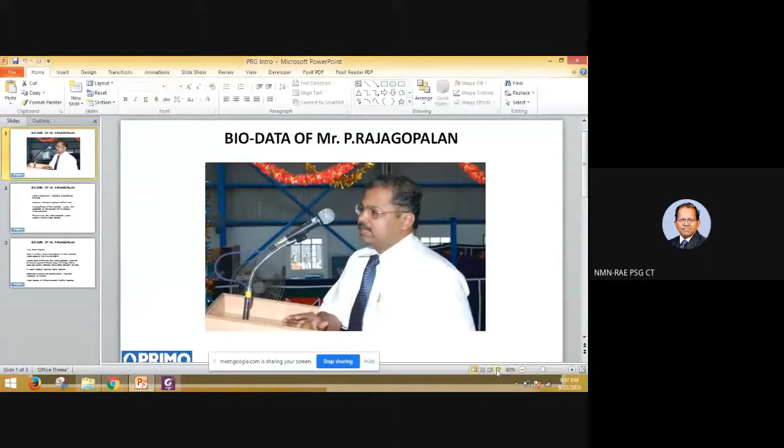He is a graduate in electrical and electronics engineering from IIT Madras and worked as a maintenance engineer in L&T for 9 years. He is presently the managing director of Primo Automation Systems, which he promoted 25 years ago along with his colleague, Mr. Balasubramanian, who is also an IIT Madras product. Together they have developed a lot of systems, with over 1,000 welding automation systems installed in India and 8 other countries.

A very creative engineer and expert in innovative design and development of various automation systems, deploying PLCs, CNCs, and robots. He installed dozens of India's first-time welding automation systems for the business segments of thermal energy, wind energy, defense, space, steel building fabrication, railway bridge fabrications, and more.

An expert in deploying advanced welding processes, experienced in designing and executing turnkey and mega plant automations for industries, a good integrator of welding and materials handling automation. So really, we are very fortunate to have him because he has that much experience in the welding industry and especially automation industries. He has accepted to share his experience. So now I hand over the session to Mr.

Gentlemen, Primo is the company that I started along with my colleague Balasubramanian 25 years ago, and this financial year is our silver jubilee year. Our current discussion here is limited to robotic welding automation and Industry 4.0, though we also do many other non-robotic welding systems.

The basic objective of robotic welding systems is to replicate the functions of a welder's arm and a welder's wrist. I have used the word basic in red color because as we go down the presentation, we will find that there are more objectives which are getting fulfilled. But this is a very basic objective where the functions of a welder's arm and wrist are duplicated by the robotic arm.

The current day robots, which have evolved over the years, are of 6-axis configuration, and the simultaneous functioning of one or more of these axes is what is helping us to replicate the welder's wrist action.

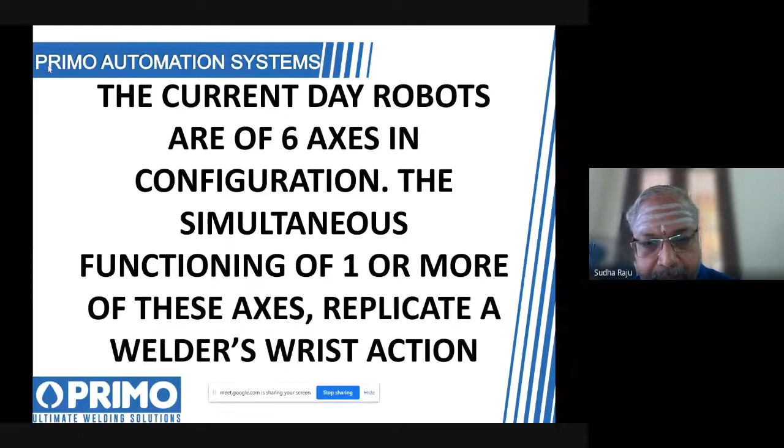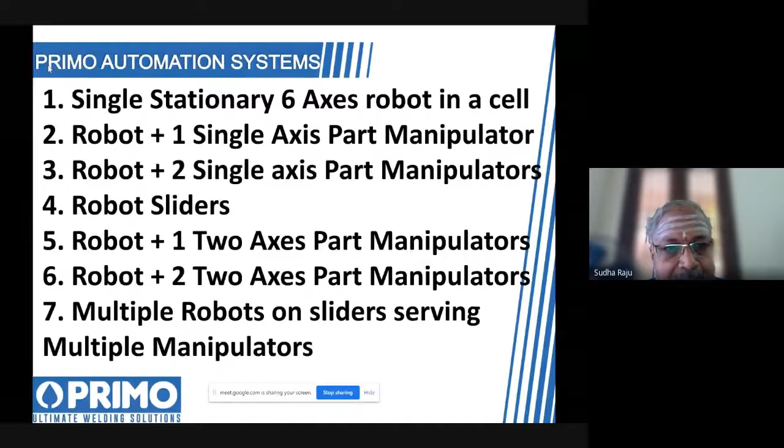A robotic welding work cell can be of various configurations. In fact, the only limit is one's creativity and innovation. However, to share some of these configurations, I have listed about 7 of them here. The first one is a stationary robot. The part doesn't move; only the robot moves and does the welding inside a work cell. All of these are presented with appropriate pictures in the upcoming slides, so let us go to them and discuss there.

The second configuration is one where you have a stationary robot, but the part is manipulated in one axis. We call it a head and tailstock manipulator, while the robot is stationary but articulated in its 6 axes.

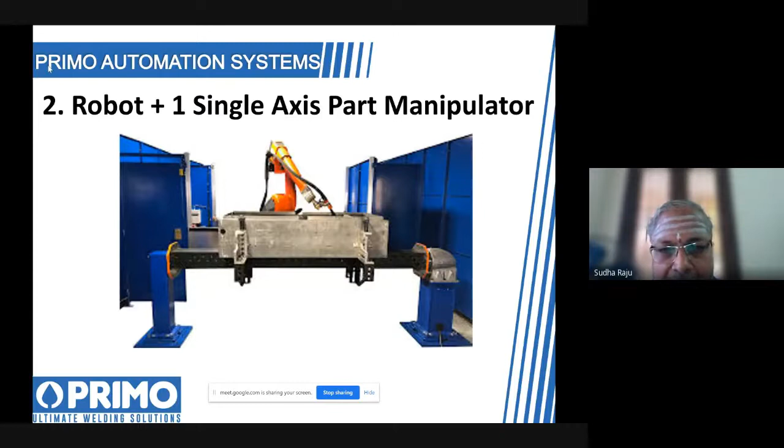The purpose of such a configuration is to mask the manual activities of loading the part, unloading the part, clamping the part. All those activities do not add to your cycle time. You can improve your productivity by having this configuration. The robot, I said, has got 6 axes, and the 2 manipulators have got an axis each. So this becomes an 8 axis work cell.

Where the envelope of the component or the part is very large, we start using what we call robot sliders. The robots by themselves have got a certain work envelope. If you put them on a slider, that work envelope gets enlarged to the extent of the length of the slider. This is one of the essential requirements of robotic welding automation where the part dimensions are large.

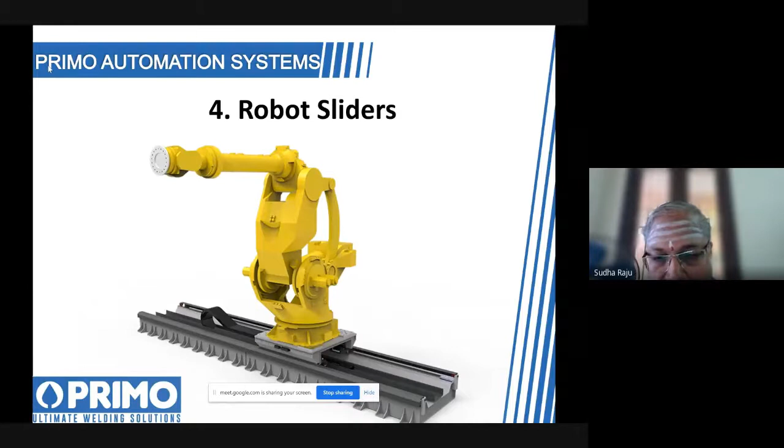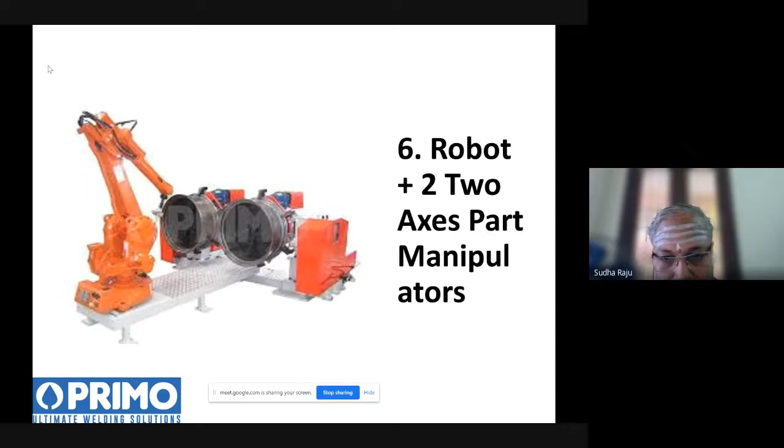The last one under the configurations is multiple robots serving multiple manipulators in a common work area. There are no limitations to the number of robots that can work inside a single work cell. And this would be a very high level of automation.

I previously said that the robots are developed to basically replicate the welder's arm and wrist. But as the robots evolve, we are also trying to do the job of a welder's brain. The current day robots are equipped with functions that help the robots to perform a little more than just the wrist function. It also does certain processing, what we call the welder's brain.

For example, a welder looks at the joint, he starts welding, and as the welding progresses, he makes course corrections depending upon the way the joint progresses. His eyes are seeing the joint, his hands are doing the course correction, and his brain is doing the processing of connecting the eyes to the hands. These functions are also now enabled in the robots. That is why I say that nowadays they can, to some extent, replicate the welder's brain also, though you can never replace the welder's skills in their entirety.

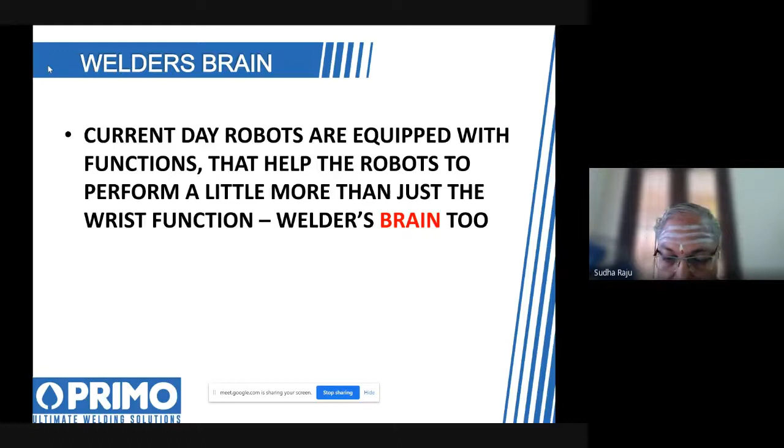Let us see a few examples of how this function is done. A situation where the robot is programmed to start welding at a particular coordinate, but we are not very sure that the job is going to be exactly there. That is, the weld start point is not going to be exactly there. It could be away by a few millimeters. But we want to start at the right place. I'll show you how the robot detects the starting edge of a component in this video.

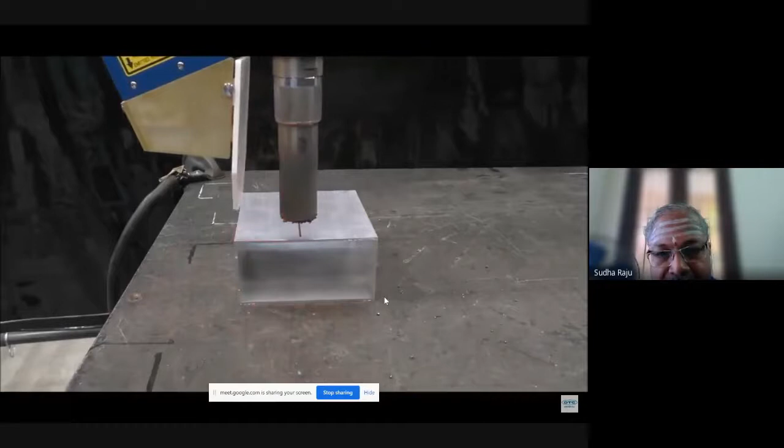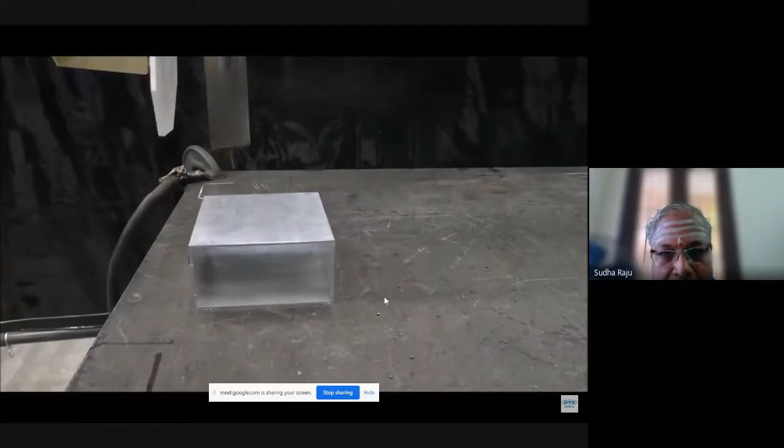This square block is being scanned by a laser sensor integrated to the robot. The robotic torch comes and stops exactly at the corner, and then it continues to track the edge. Now you will see the part being disturbed in position, and you can see how the robot tracks the start point again.

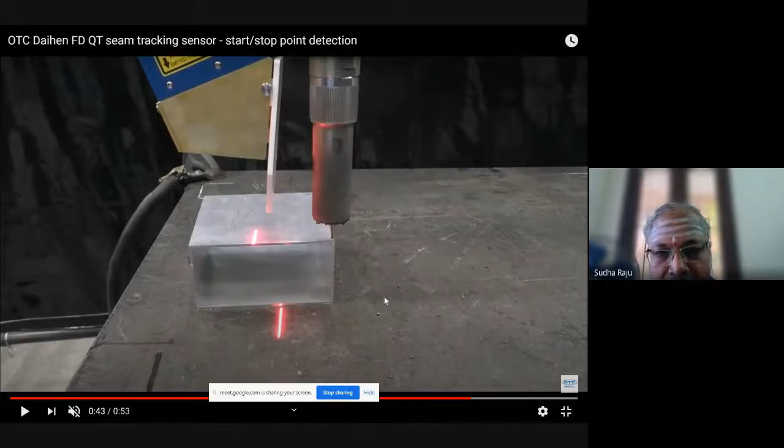Yes, you see that the robot has come and stopped exactly at the start point even when the part was disturbed in its position. It then continues to track the edge and stops exactly at the end. So this is basically to demonstrate the operation of a function called start point detection, which enables the robot to understand the start and the end points. This is used when the welding is actually a straight line, but your start and end points could be varying. So the robot detects the start point, detects the end point, and does the welding automatically.

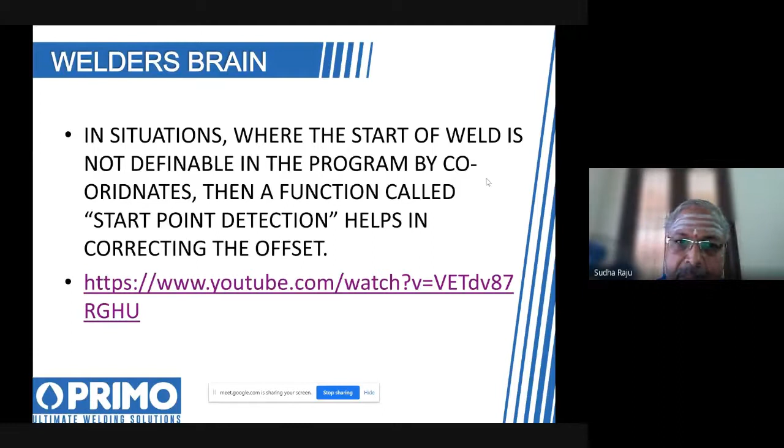In the same direction of replicating the welder's brain, let us look at a second situation wherein the robot starts welding, but the actual joint is not in the programmed path. The programmed path and the actual joint are differing. It could be the variations in the component or the variations in the fit up. The robot has got a function called through the arc seam tracking, where while welding, it will understand the root of the weld and track it. Let us have an idea of the same through this video.

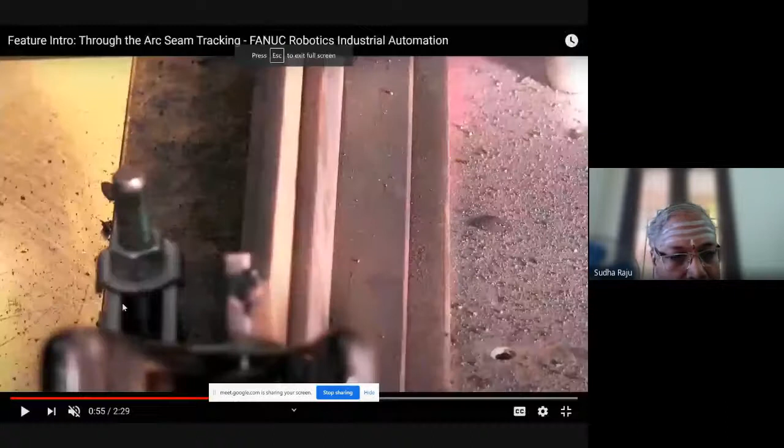You are seeing the joint here in this picture. This is the joint where the welding has to happen, and you will now find the programmed path of the robot is completely deviated from that. You can see the amount of deviation.

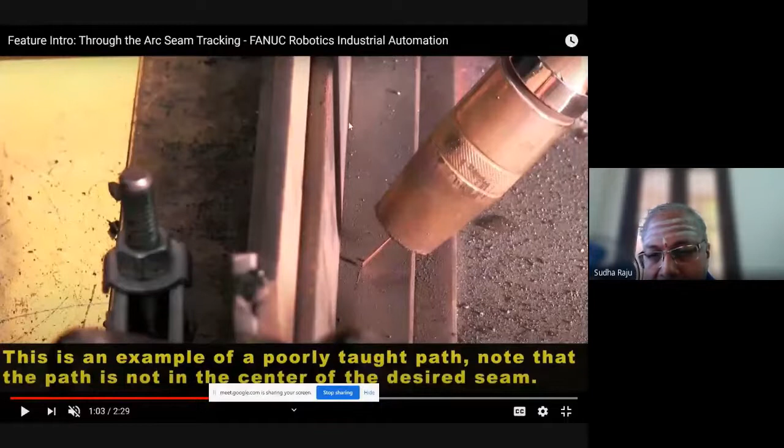This is where the joint should have been, but this is where the joint actually is. It could be an error in teaching, that is why it is written as a poorly taught path, or it could be an error on the part fitment.

Now, once you start welding, the robot, through the welding parameters, continuously does the course correction and will weld exactly on the joint. The torch is weaving across the weld joint. Now you see that the fillet is exactly at the root.

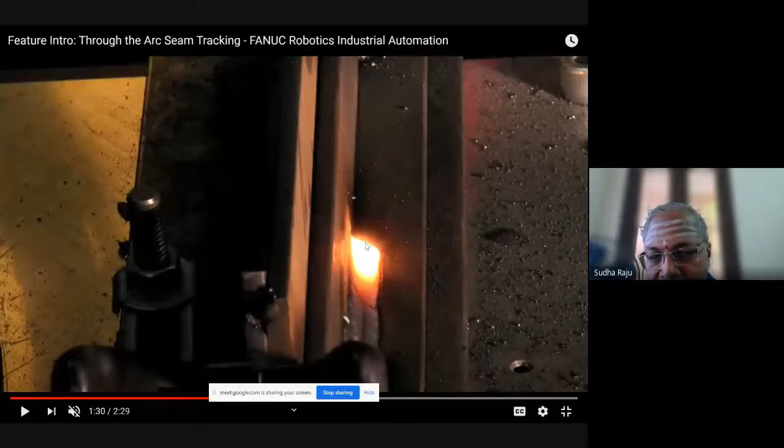Actually, it should have gone like this. This is how the robot does the course correction. It picks up the welding parameters as it does the weaving at the left and the right end of the weavings, and continuously processes those data to average them out. You will see a second weld now, which will also happen exactly at the root.

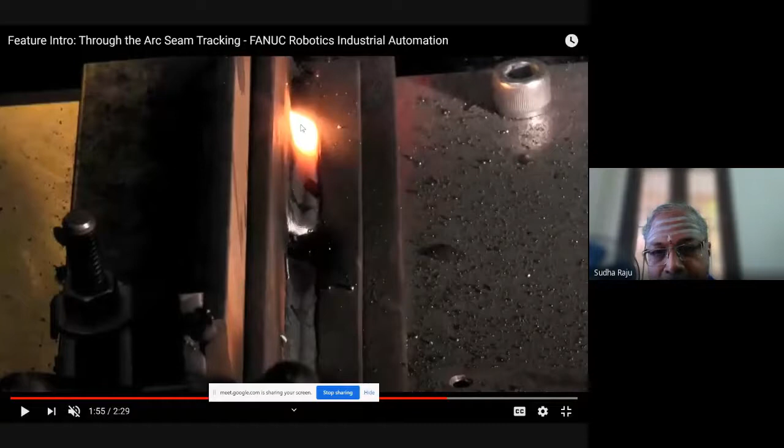You can find that the weld has happened exactly at the root. It has not deviated. This is one of the tools or functions in the robot called through-the-arc seam tracking or arc sensor. Different robots have got different names for it. This also is a tool that helps us to replicate the welder's brain to some extent.

Now, let us look at a situation where the robot is not going to be programmed. Whatever the joint profile is, the robot is expected to track it. Previously, what we saw was a situation that we have a programmed path, we have an actual path, and there is a deviation. We are going one step higher in this.

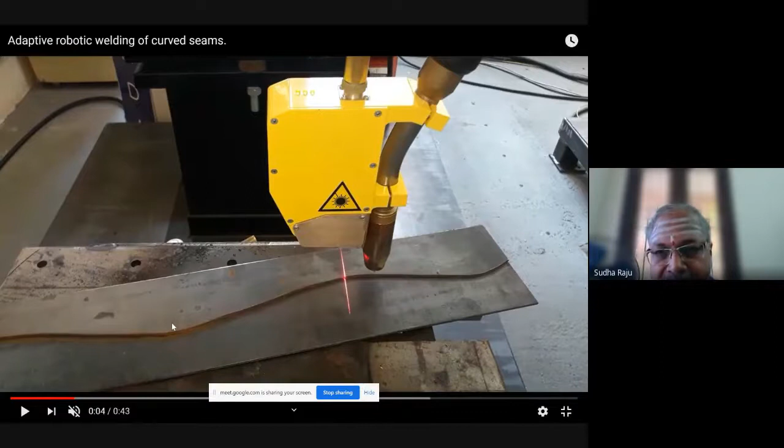I don't have a programmed path. I have a profile, and the robot has to see the profile and track it. You can see how this is being done. Here we use laser sensors. In the previous one, we did not have a laser sensor. The robot itself had some functions built into it, but this is a more demanding requirement.

You can see the weld joint here. It is in a profile. The bottom plate is a rectangular plate. The top one is a laser cut part, and the welding has to happen between these two parts. This laser scanner, which is leading the welding torch in the robotic arm, continuously processes the weld joint dimensional coordinates, sends them to the robot, and the robot continuously makes course corrections dynamically as it travels.

Now you will see that happening. Just watch the robot arm turning its wrist and continuously tracking the edge. These are the intelligent functions that are getting built into the robot, and it's a continuous evolution process. This is not pre-programmed. This is not pre-taught. On the fly, dynamically, this is being tracked.

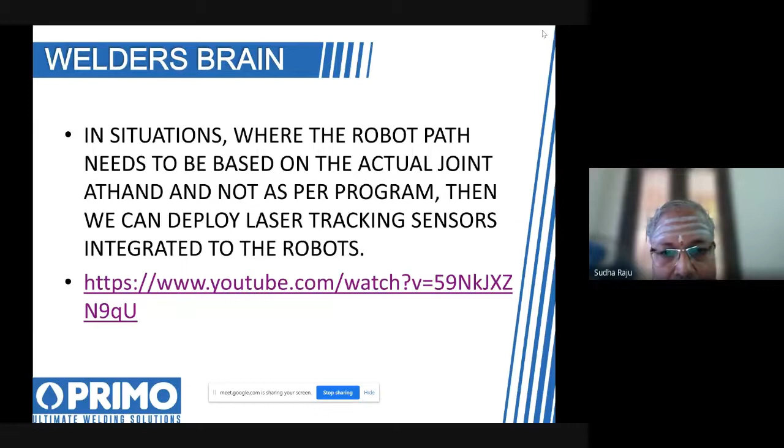So these are some of the functions where the robots not only replicate the wrist or arm of a welder, but it also does the functions of a welder's brain to some extent.

Now let's look at a few robotic system images which we have built in the last few years. And after seeing them, we can also look at the videos of some of them.

In welding, you have arcing time and non-arcing time. Even though non-arcing time is an essential requirement, it is not a productive activity. So this configuration helps us mask the non-arcing activities, thereby giving a very high arc factor. Arc factor is the percentage of time that we are arcing on the work cell. If the robots and welding machines are idle, we are not producing out of the work cell, even though we may be working on it. This kind of configuration would have an arc factor as high as 70%, which is not a practical possibility in a manual welding environment.

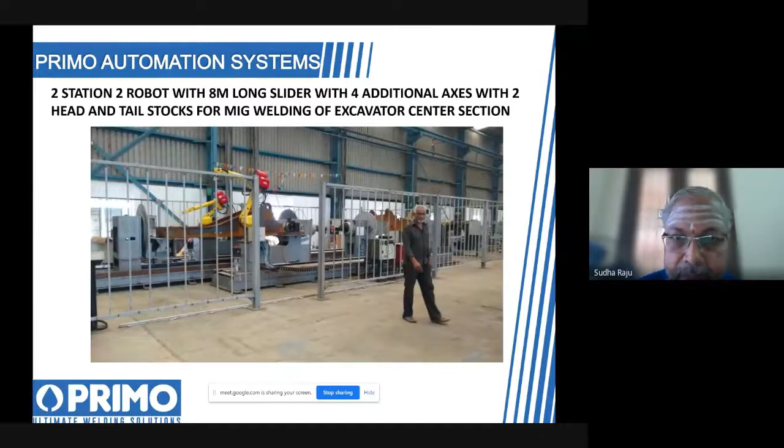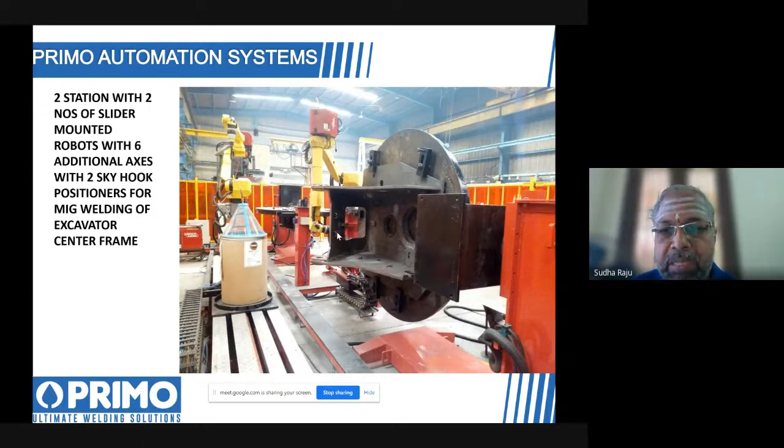This is the same configuration, the same part as the previous picture, but here we have two robots doing the job. These decisions are taken based on the output required in a shift of 8 hours. In the previous work cell, the customer wanted a certain output per shift, and in this work cell, the same customer wanted a very large output. So we have two robots serving two manipulators, and each robot is on its respective slider.

If you count the number of axes in this configuration, each robot has 6 and 6 axes, that makes 12. Each robot has a sliding axis, that makes it 14. Each manipulator has 2 axes for rotation and tilting, that makes it 4. It's an 18 axis robotic work cell - a very highly automated working environment with very high levels of productivity.

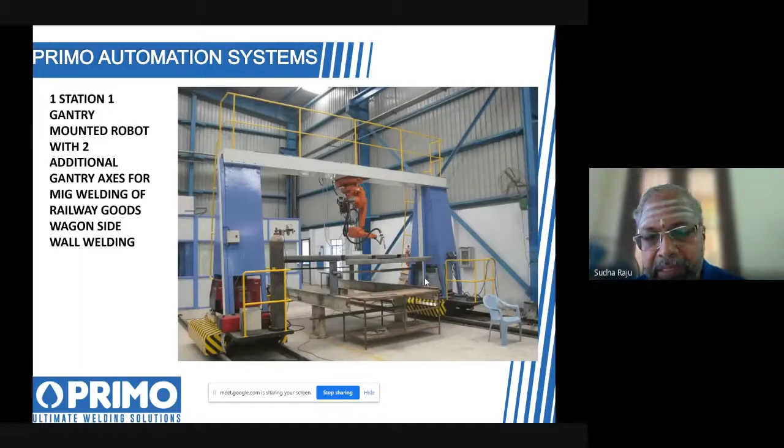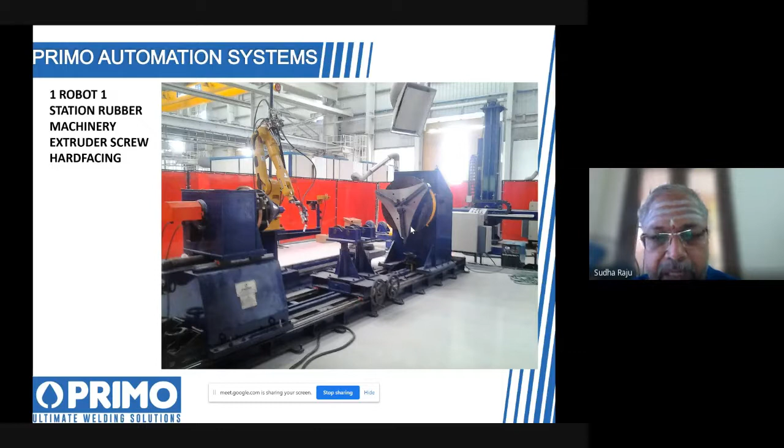Robots are also used in large, heavy fabrication areas. In fact, we specialize in them, and not just the sheet metal stuff or the light ones. What you are seeing here is a head and tail stock for doing hard facing on an extruder screw. It's a very large screw weighing heavily, and the robot would perform welding continuously for hours together on one screw once it is started.

This is another configuration. In the starting of the presentation, I said that the only limit to robotic cell configuration is the creativity and innovation.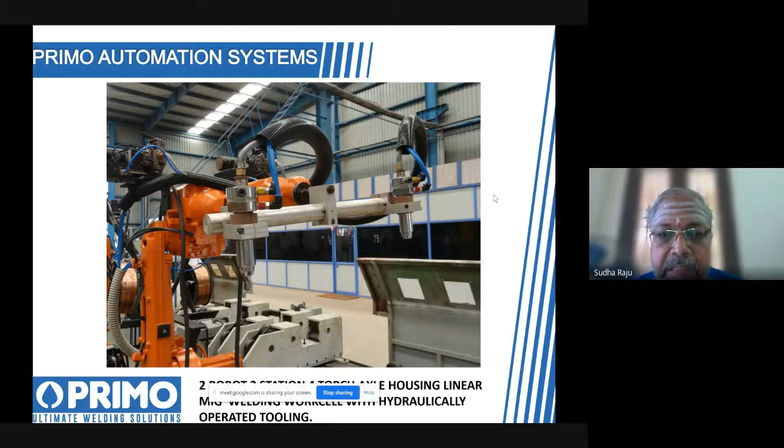As I said, there are a lot of creative and innovative options in robotic configurations. What you are seeing here is two welding heads mounted on a single robot wrist. When the customer came and said that he wants to produce 400 dummy axles per day of 24 hours, we worked out this configuration.

There are two such robots on the machine, which means there are totally 4 torches handled by 2 robots, and each torch is doing MIG welding with a 2 mm wire at 600 amperes of current. Normally, MIG welding stops at 1.6 mm wire, but we stretch the limits and use 2 mm wire, 600 ampere per torch, 2 torches per robot, and 2 such robots on the work cell. That makes it 4 torches, 4 into 600, 2400 amperes of MIG welding simultaneously on one component.

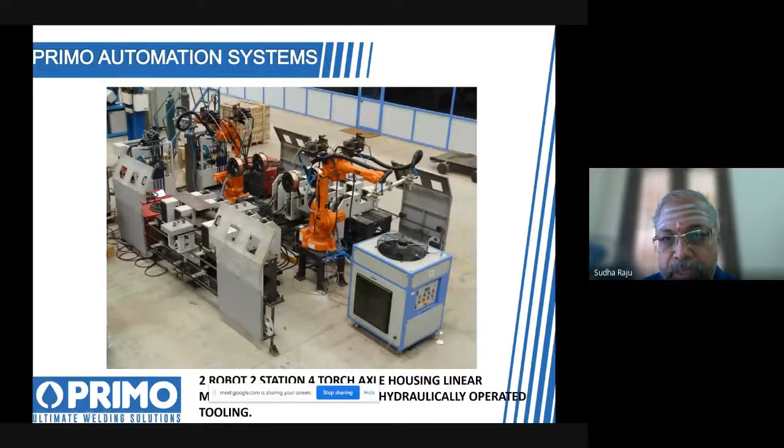And like that, there will be 2 work cells at the front and rear to get the required productivity. You are seeing that actual image here. This is one robot carrying 2 torches. This is the second robot carrying 2 torches. You can see the 4 spools here. This is one work cell, and this is another station A and B.

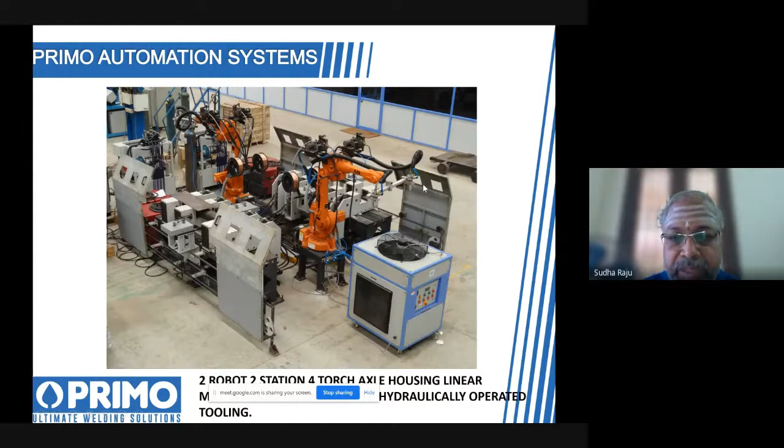So we mask the loading, unloading, clamping and declamping times. We also increase the arcing productivity with 4 torches. This is a hugely productive work cell configured by Primo for our customer.

Having seen some images, let us look at a few of the videos of this equipment.

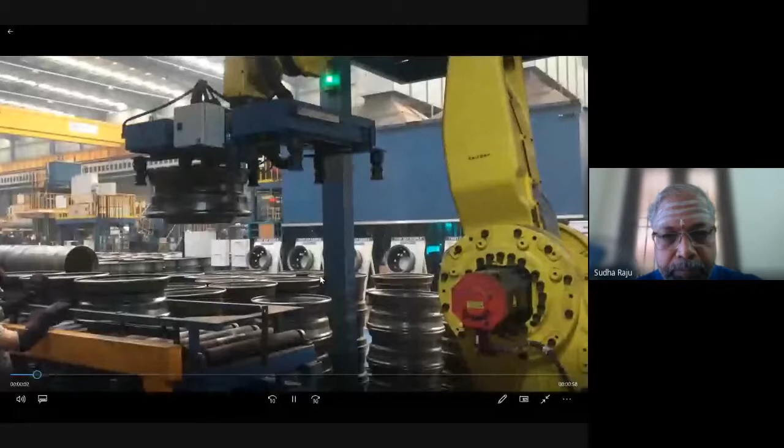In this video, the robot does the material handling while welding is happening on fixed automatic machines.

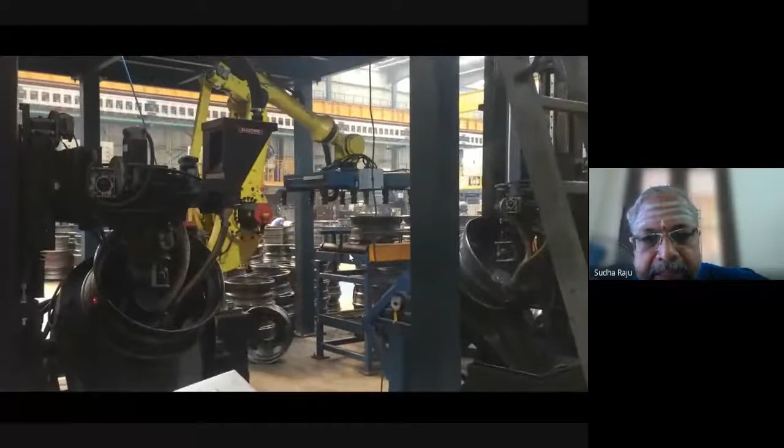The robot is serving 4 welding stations. There is an in-feed conveyor and an out-feed conveyor. The robot picks up from the in-feed conveyor, places it on any one of the 4 stations, and places the welded wheel on the out-feed conveyor.

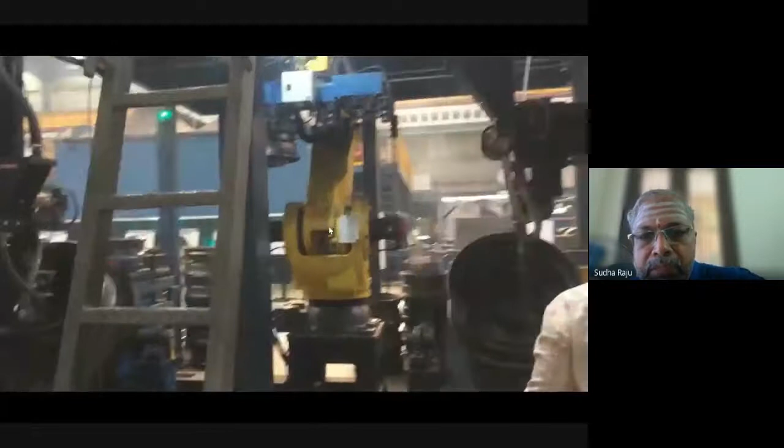The robots will not come to the welding machine unless the operator presses the button saying that he has moved away.

Now let's see another machining application where the robots are used for loading and unloading.

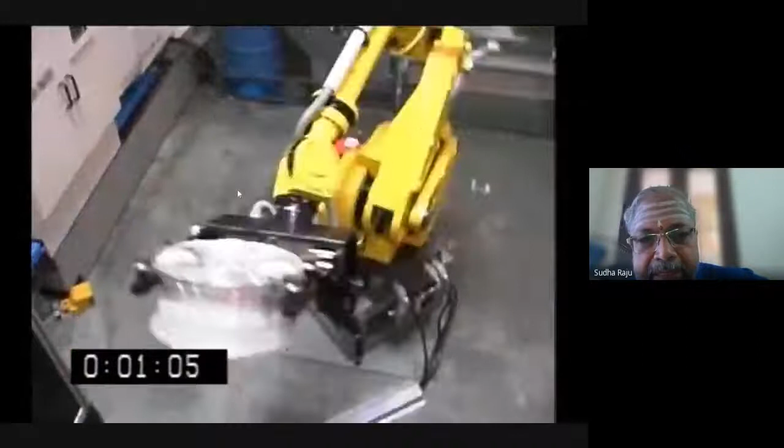You can see how continuously the robot is serving the 3 machines. The wheel moves from one machine to another, and it places the processed wheel onto the outfeed conveyor. As you can see, it is 1 minute 7 seconds processing time and 53 wheels in 1 hour, just over a minute per wheel, with 3 operations happening.

I'll now show you another video. All these are to basically expose the various kinds of possibilities that are there with the robot in an automation environment, either for welding or for handling or for combining welding and handling. Now you look at this video, it's a pleasure to watch.

It's very important to keep the welding requirements in mind when configuring the robotic work cells. Which joints need to be welded in 1G, which have to be welded in single layer. All these need to be considered before configuring a work cell.

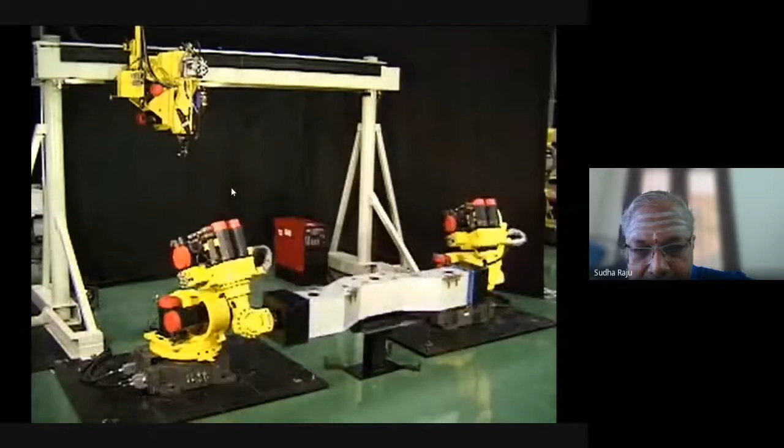Can we call this a completely unmanned work cell? It is practically so. We just have to bring the part through the crane and take the part out by the crane.

I will now show you another video wherein the profile of a screw, an extruder screw, is being tracked by the robot. You are seeing an extruder screw here, used in a food processing industry machine. The flights are a continuous spiral, and you will see how the robot is tracking this spiral.

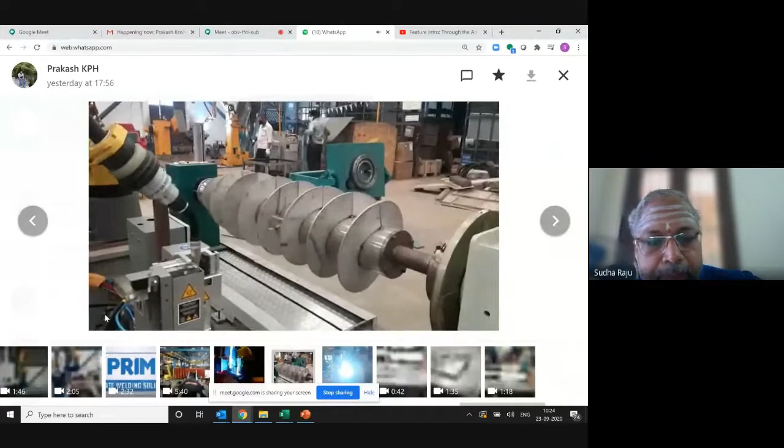This is the wire cutting and cleaning station, where the wire, that ball tip of the wire, is cut. The gas cup is cleaned to avoid porosity in the welding, and then the robot detects the start point automatically.

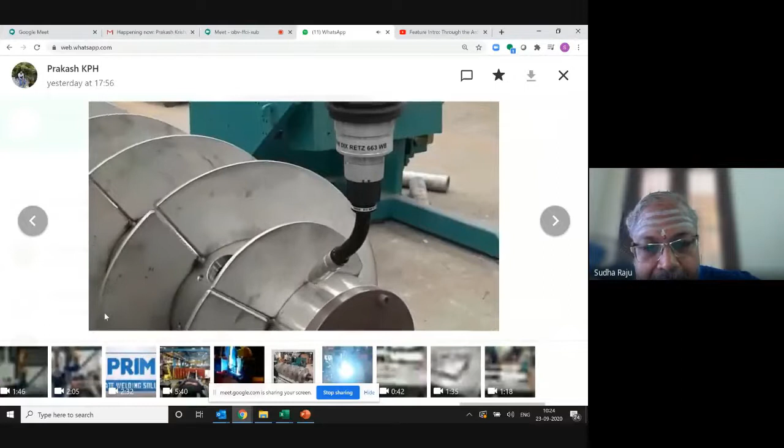I had shown about start point detection previously, and welding is switched off to give clarity on how the tracking is happening. The robot is tracking a spiral, a continuous spiral. In fact, we also have spirals of varying pitches in one component.

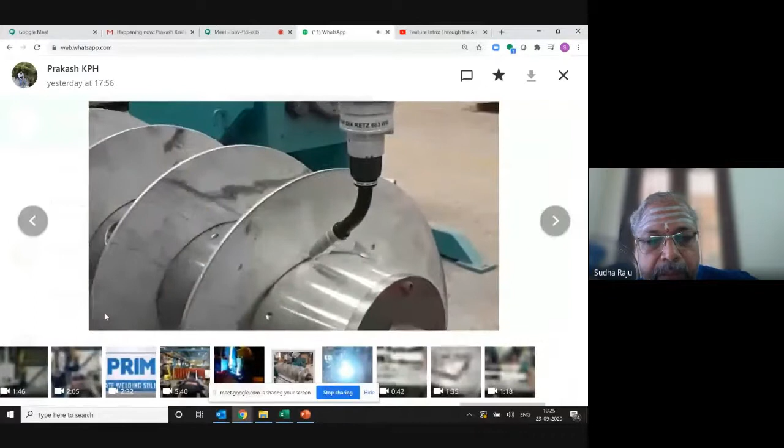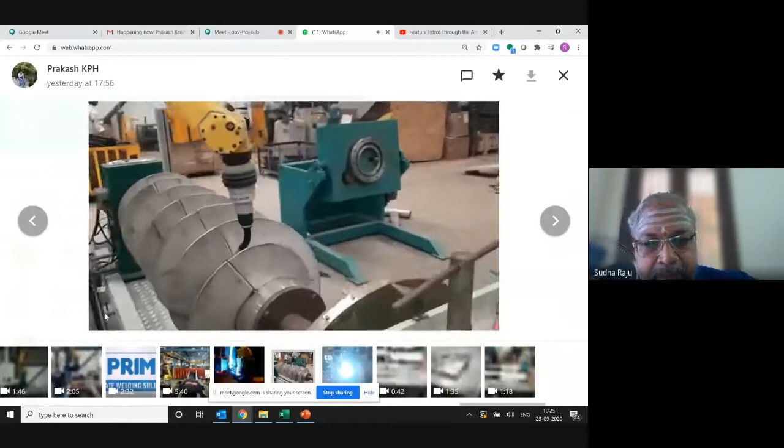It is just hugging to the weld root very intelligently. All the intelligence is hidden. You are only seeing the robot arm tracking the weld root, but a huge amount of data processing is happening to achieve this functionality, because it is not easy to duplicate the welder's brain.

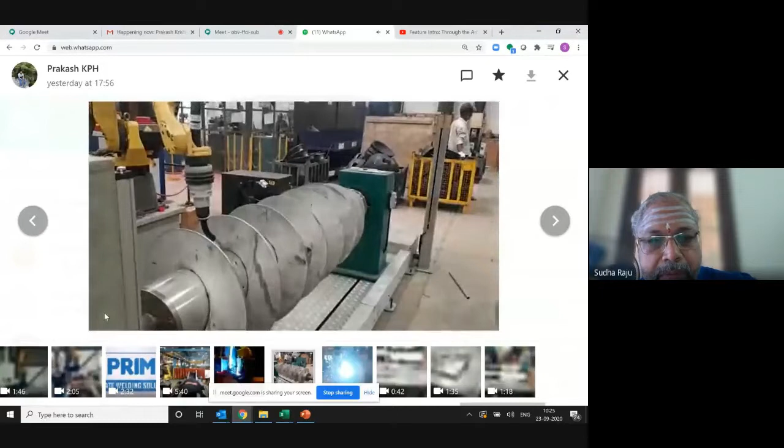These are trials happening in our factory before the machine is shipped, to check whether it meets all the customer expectations.

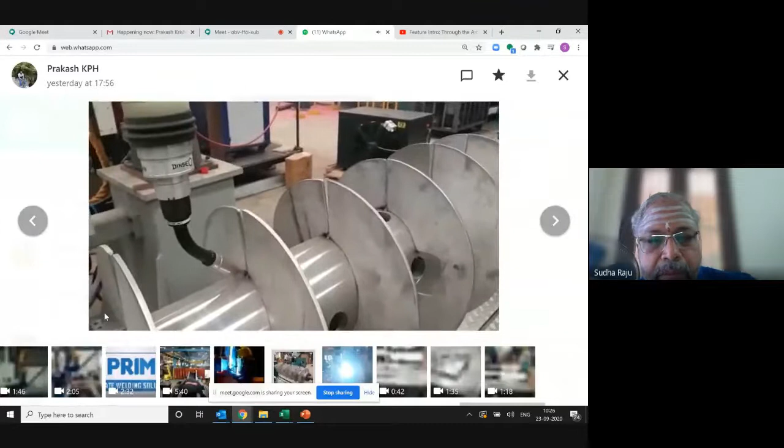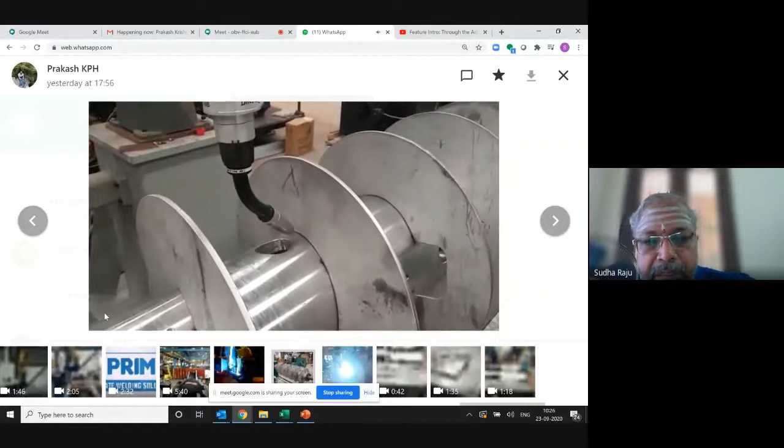The total weld length could be as long as about 5 to 6 meters in one component. The entire 5 to 6 meters would be completely automatically welded by this robot. There are openings in between where we should stop the weld and restart. There are huge possibilities with the robot in any given application.

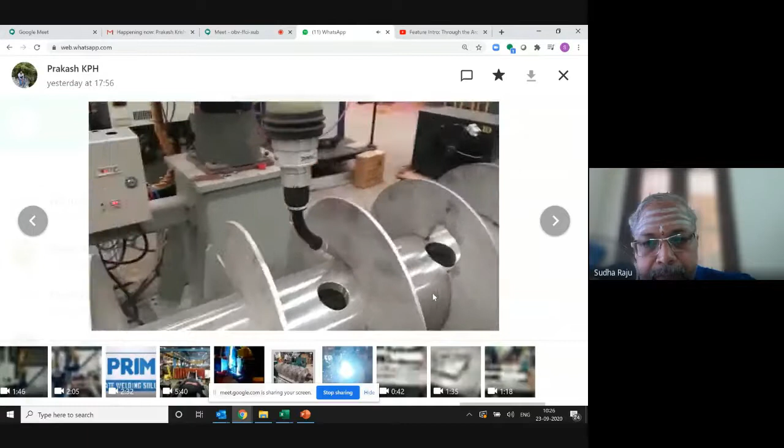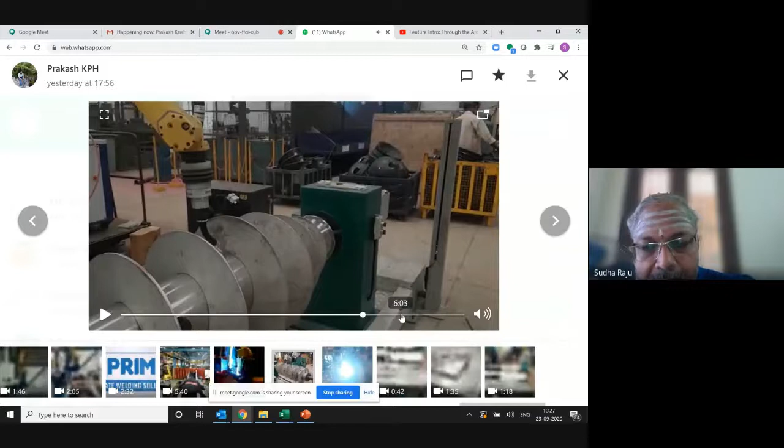I'm just fast forwarding because the whole idea is to understand the functionalities, right up to the end.

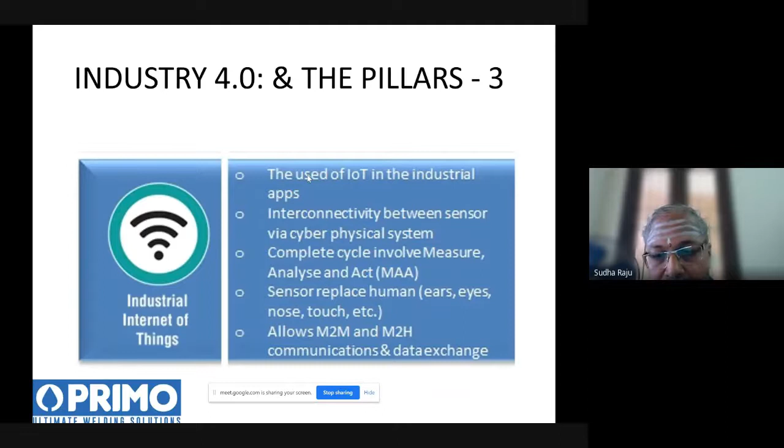And it works on the principle of MAA: measure, analyze, and act. Measuring is done by the sensor, which is on site, on the machine. Analysis is happening on the cloud, and acting on the analysis is done either on the on-site machine or in another third-party environment. And these sensors basically give us various inputs on various machine parameters, as well as giving us human feedback. And IIoT allows machine-to-machine communication and machine-to-human communication.

The fourth pillar of Industry 4.0 is an autonomous robot. What is an autonomous robot? In one of the previous slides, I had shown a video of a laser cut profiled plate being welded. There is nobody who does the programming of the robot, nobody who does the path teaching. The robot goes to the part, it understands what is to be done. This is one level of autonomous, we call it semi-autonomous. Industry 4.0 talks of fully autonomous robots. Robots that work independently with their own sensors. They know what to do, when to do, and where to do.

And interconnectivity and interoperability between the robots. Here also we have the machine-to-machine and machine-to-human communication. And cobot, which is the latest thing happening in the robotic environment, where the robots are used as a tool by the humans. They don't replace the humans. They work along with the humans.

Generally, you would have seen that robotic work cells are fenced, as you would have seen in the various pictures and videos. And the whole idea is to ensure that the humans do not enter the robot working environment. There are light curtains, which would sense a person walking in or a person's hand entering the working area. It would automatically stop the robots in a normal robotic cell. In a collaborative robot, it is the opposite of it. The robots work along with the human. The cobots also come under the category of autonomous robots as the fourth pillar in Industry 4.0.

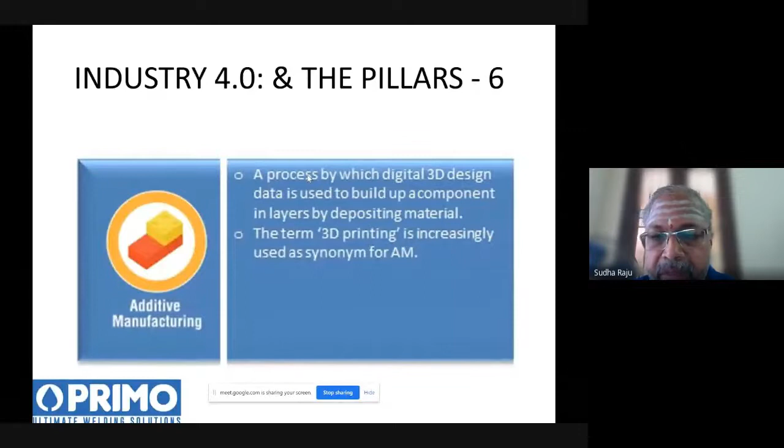The seventh pillar is cyber security. These are names that we would hear only in the IT department of an institution or a factory, right? We don't bother about cyber security on the shop floor, but Industry 4.0 says cyber security is one of the pillars of Industry 4.0. The reason is it's a completely connected environment. Let us take a machine. The machine has got lots of sensors in it. Those sensors are always communicating to the cloud. The cloud does the processing and the cloud initiates action based on the process or the analysis.

Now, let us imagine a situation where somebody hacks the information that is going from the sensors or the decisions that are coming after the analysis. If so, a machine could be made to perform a false operation. There are safety issues, there are damages. So cyber security is one of the essential requirements and is the seventh pillar of Industry 4.0. In other words, if somebody is taking Industry 4.0 as a career objective, he not only needs to know about robots or programming or automation, he also needs to know IT. Or somebody who has IT knowledge gets into Industry 4.0, he should also know the other side of it.

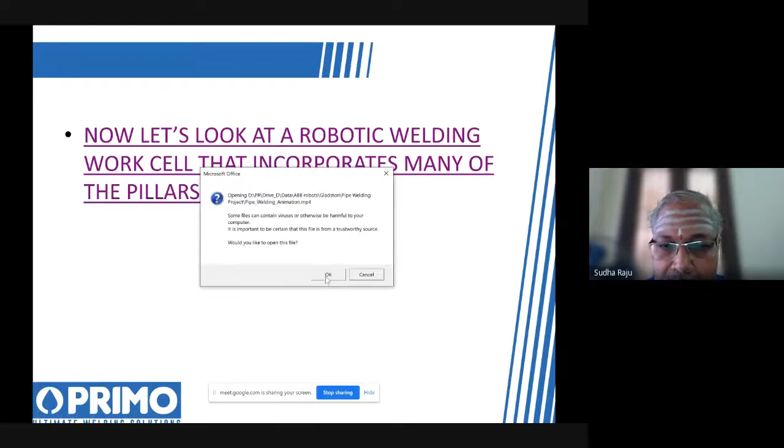Now coming to the close of the presentation, let us look at a work cell that we are right now building. In fact, this whole work cell was designed during the COVID-19 period. It incorporates many of the 9 pillars of Industry 4.0. It is also a very high-end multi-robot, multi-manipulator work cell with mechanized material handling. It's a pipe fabrication work cell.

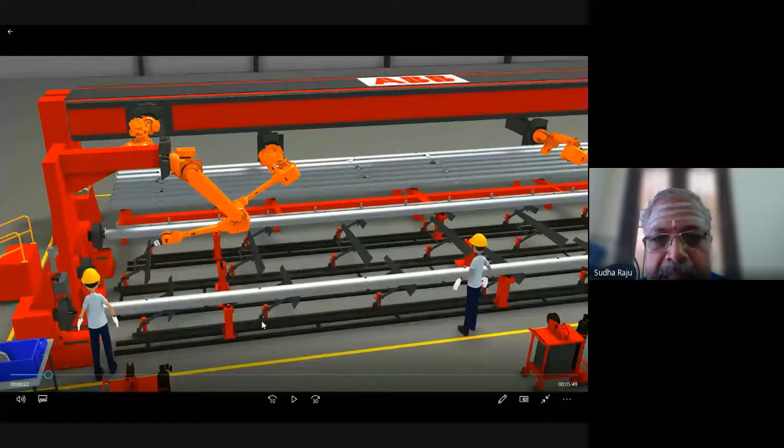Gentlemen, what you are seeing is a simulation at the design level. It's a 3D simulation, where we are bringing in one of the pillars of Industry 4.0 you would have seen, 3D simulation, where we are trying to merge the virtual reality and the physical reality.

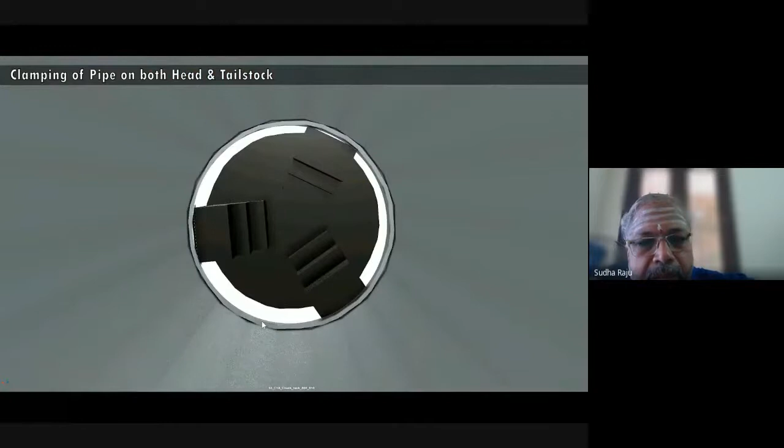These are 12-meter long pipes. There are two flanges to be welded. We clamp the two ends. The operators place the manual couplings and tack weld them.

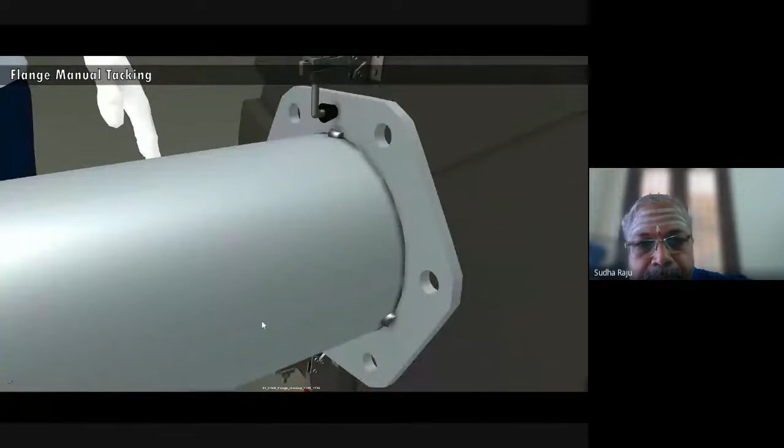Now the pipes are getting assembled in station 1. These are laser scanning to ensure that the orientation between the coupling and the flanges is automatically maintained. It does the tack welding. The pipes move automatically to the second station where there are two robots.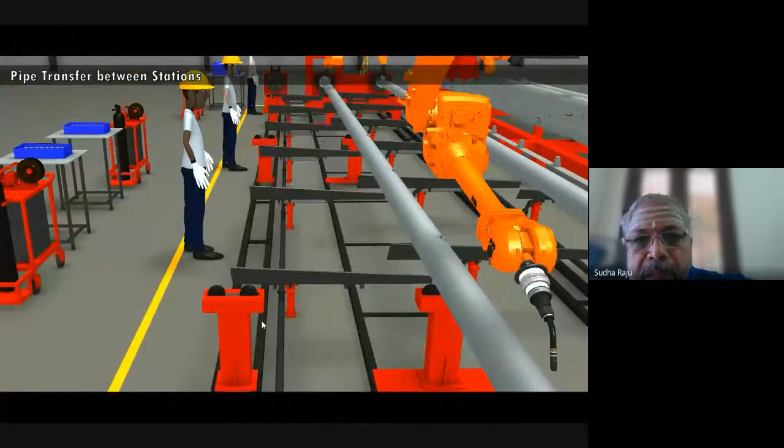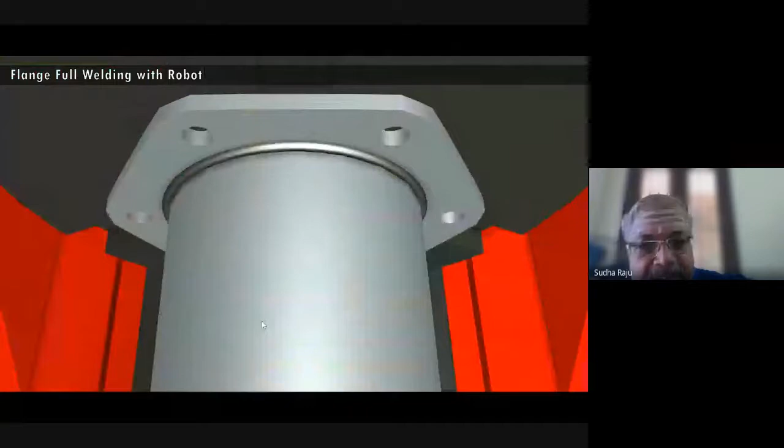There is a laser scanning of the coupling position, laser scanning of the weld joint, what we have seen as start point detection in the previous slides, and then the robots perform the welding of the flanges. Now it scans the coupling to weld the coupling here.

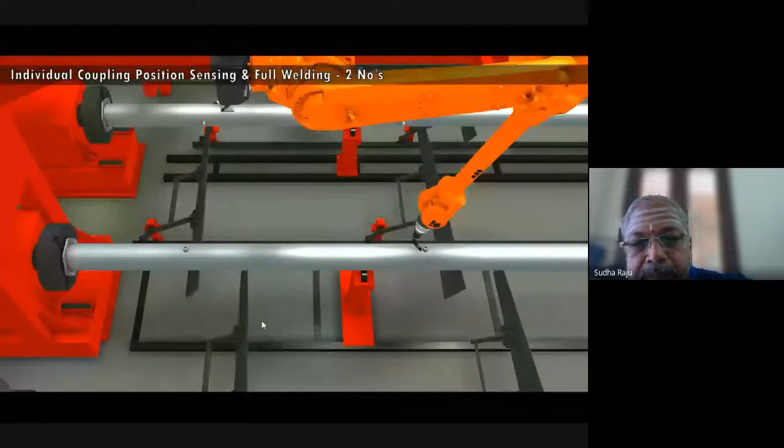The robot then goes to the second coupling, scans it. You will see it scans in 2 axes and then decides where the coupling is and then performs the welding. Now the pipe rolls down to the third station.

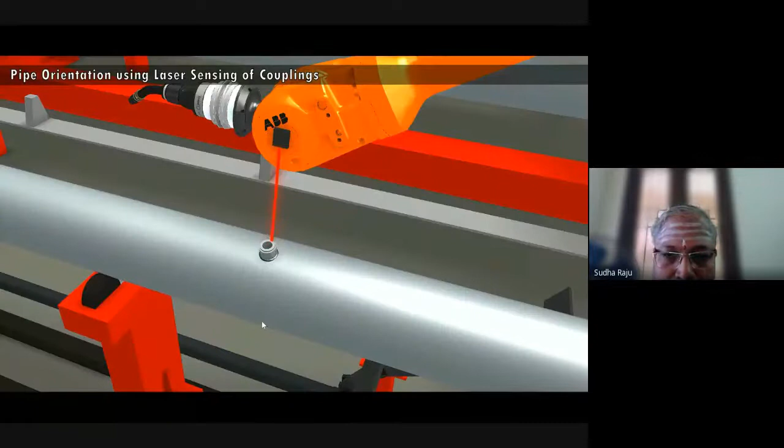In the third station, some more brackets are placed on the pipe. There are 4 robots in the third station. It scans for the bracket, picks up the brackets, slides along the 12-meter length, places the bracket, while another robot will come and do the tack welding.

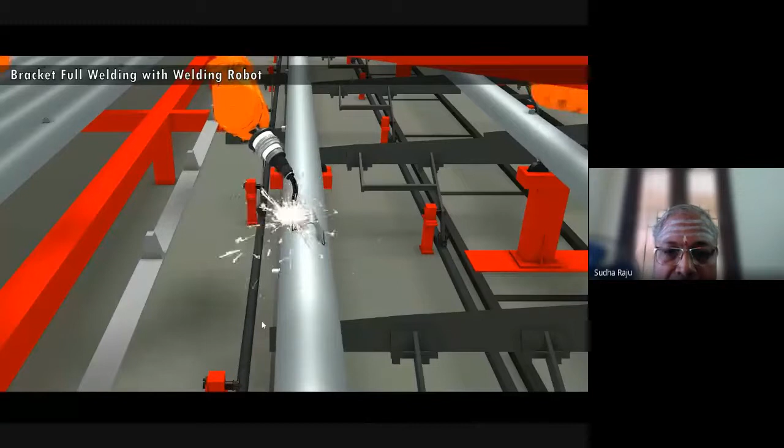The pipe turns by 180 degrees. Another bracket is placed and welded. What you are seeing is a 3D simulation wherein we merge the virtual and the physical. This whole system is designed to roll out one pipe every 5 minutes. There are 8 brackets, 8 couplings, and 2 flanges to be placed and welded.

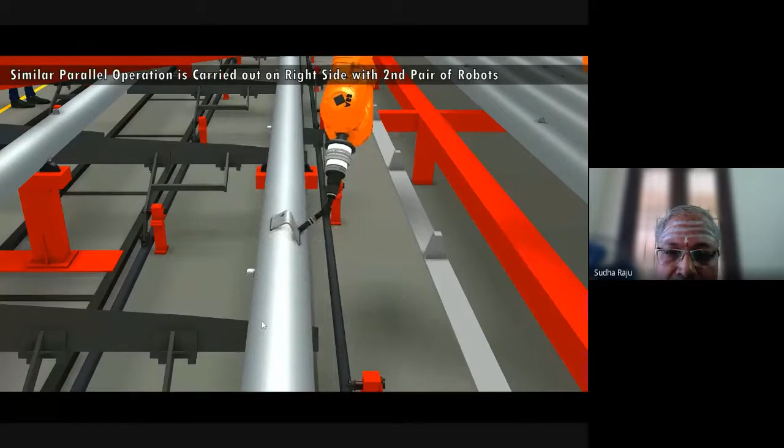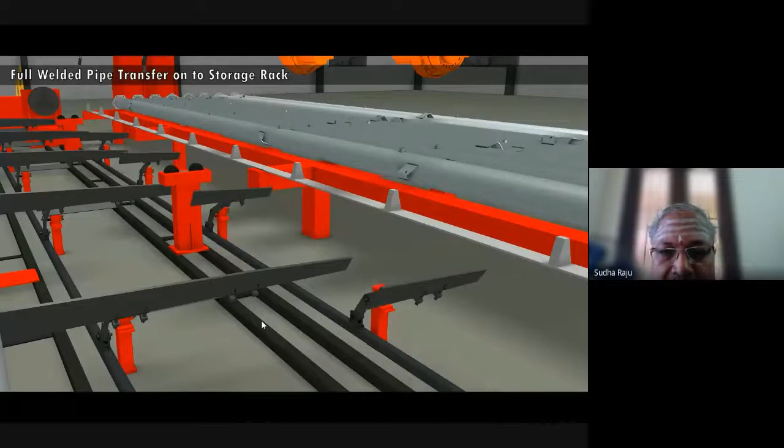After it is done, the pipe gets unloaded onto an unloading ramp after finishing the rest of the coupling. There are a lot of laser sensors and scanners and part sensors. They all communicate, and all the robots are Industry 4.0 compliant. The output of this machine is known to the customer continuously as the production happens. There's no need for somebody to note down and write a logbook and send a mail.

This cell should be ready in our factory probably in another 2 months from now. It's under manufacturing.